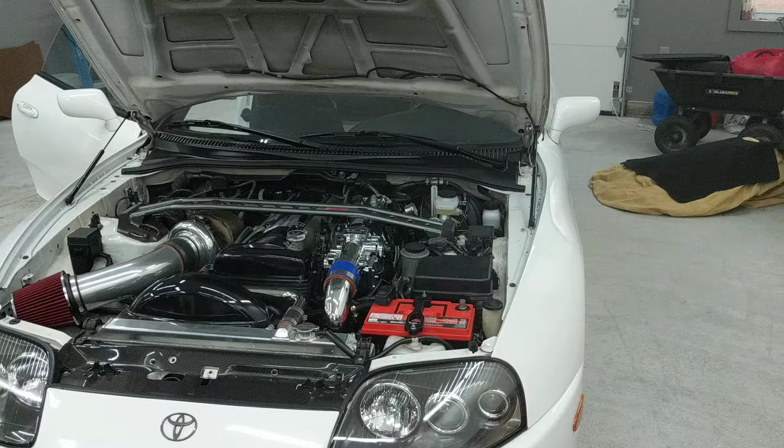Hey, it's Charlie here. I just got done wiring up AEM version 2 for my 95 Toyota Supra twin turbo. Technically it's a single turbo now. I just wanted to go over how I wired everything up, all the sensors, the locations, the wiring, and even talk about the fuel pump pot wire.

So to start, this is everything that I removed from the car. This is the factory ECU. You don't need that when you run AEM, it replaces that box. This is the front O2 sensor, you don't need that either. With AEM, you'll use the wideband sensor to meter everything.

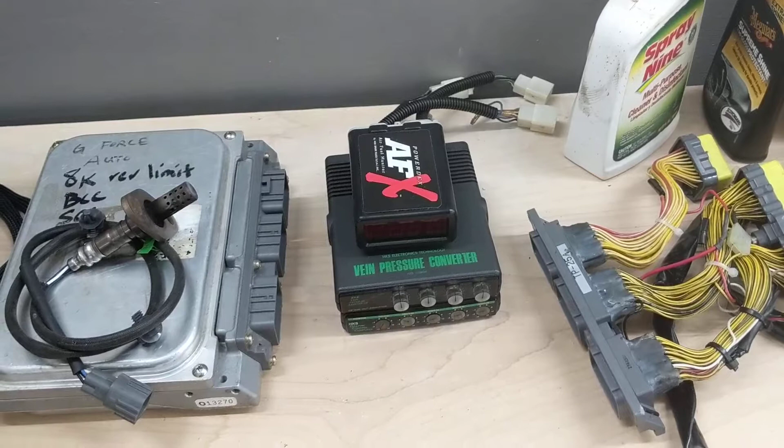My car had some piggyback stuff in it when I bought it. This is all aftermarket stuff. This is an old school HKS VPC and a GCC, and this is an AFX wideband gauge that's also very old school. I didn't need any of that, so I was able to take it out. That was all the wiring for everything.

There was a manual boost controller. I'm going to have AEM control the boost now, so I don't need that. These are just some sensors that went with the old stuff.

And this was an old Boomslang harness, and this would go between the factory ECU and the factory ECU connectors, so that when you wanted to wire in all of this aftermarket stuff, you could wire into this and you wouldn't hack up the OEM harness. But all that is removed. I don't need it, I'll be selling it soon.

And this is what's going in the car. This is AEM version 2, I bought it brand new. These are all of the sensors: there's the IAT sensor, the boost control solenoid, the map sensor, and this is a wideband controller.

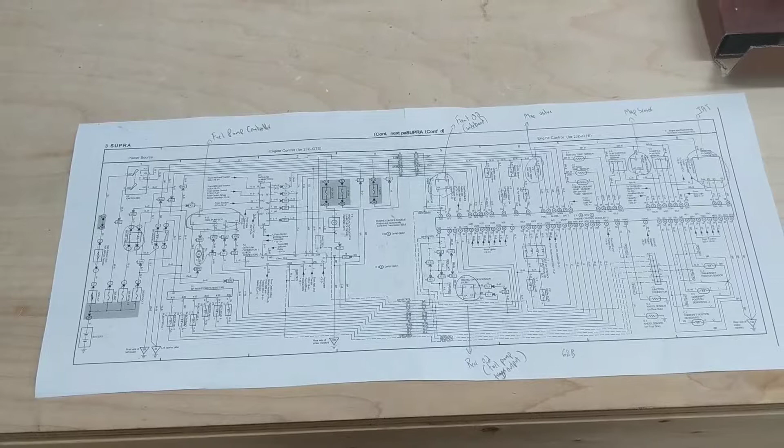Before you start wiring in AEM, I'd recommend printing out the factory wiring diagram. This can be found in the service manual, it's 2 pages, and you have to find where they are in the manual, but once you print them out, you can cut the top off one of the pages and tape it down the center, and then you'll have a view of the entire wiring diagram for the engine.

So I've highlighted a few things we'll be talking about. That's the OEM fuel pump controller. This is the front O2 sensor, this has got to be wired up to be the wideband. This is where the Mac Valve is going to be wired into.

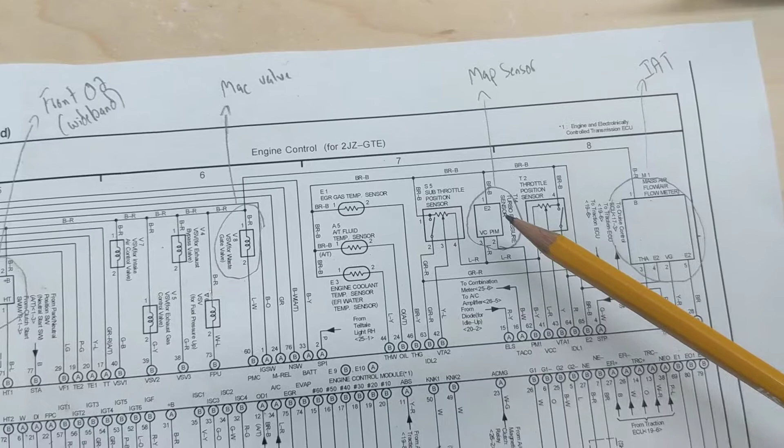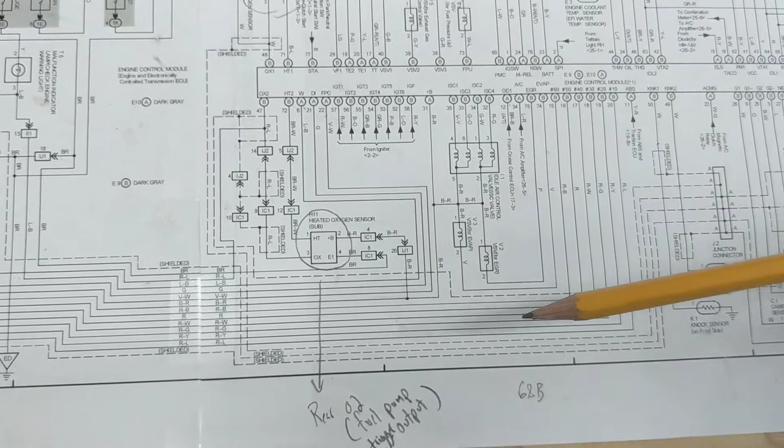This is the factory map sensor location, that's sort of going to be wired in with the AEM map sensor. This is the factory mass airflow sensor, and that gets removed from the car, and we're going to be wiring in the IAT sensor to that wiring. And then down here is the rear O2 sensor, which you don't need with AEM. I'm going to be repurposing one of the low side outputs that went to it to control my fuel pump.

So let's talk about the sensors.

Down here is where I mounted the air intake temp sensor, right on the intercooler pipe that goes to my throttle body. It comes with an aluminum bung to weld in, but my piping is stainless, so I had to order a stainless bung online.

Anyone else that needs the size, it was 3/8 NPT. So I put it here. Some people will argue it should go on the air intake so it measures the temperature going into the car. But I have a front mount that's going to cool the air down, and other people argue it's better to have it after the intercooler, so it's measuring the cool air. That's what I like to do.

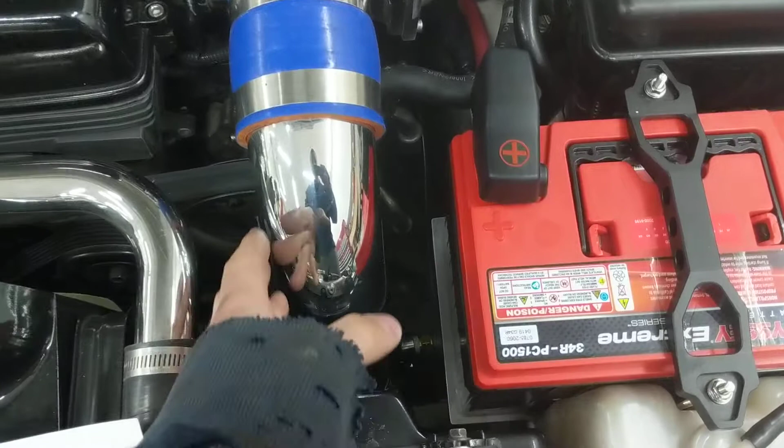I like to mount it down a little bit to give myself some room. I know some people even mount it on the throttle body or higher up, but I don't want it to get heat soaked at all. I wanted to give myself room in case I ever decide to spray meth - you wouldn't want to be spraying meth before the air intake sensor. So this gives me about a foot where I could put a meth nozzle on either side if I had to.

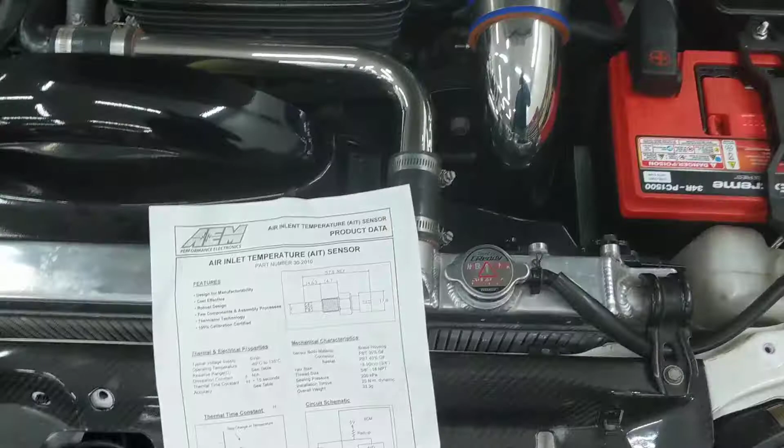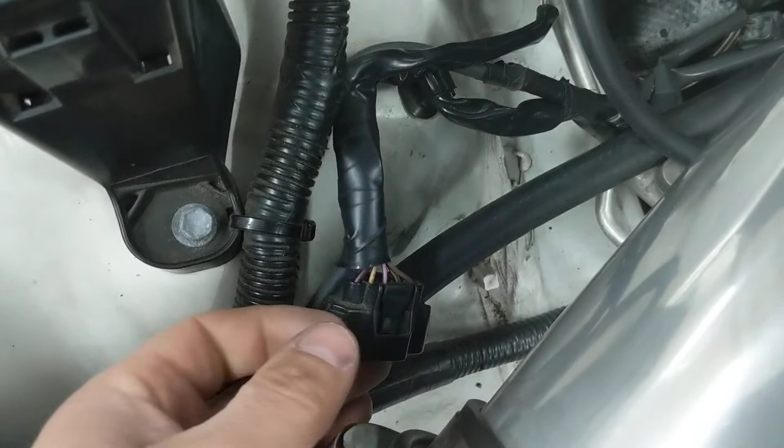So the wiring for that is really simple. There's 2 wires that come off it. One goes to B65, one goes to B45, and those ECU locations already have wires that run from the ECU over to the mass airflow sensor connector. So there's a pink and blue, and a brown and black wire on this connector, and those go back to those ECU locations. So we can tie it in right there.

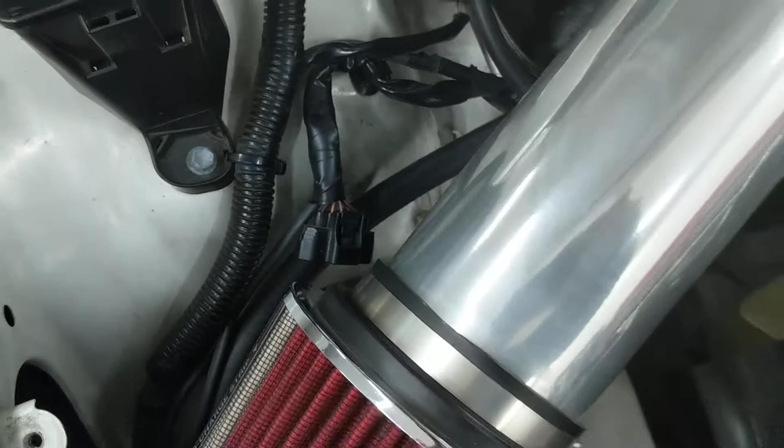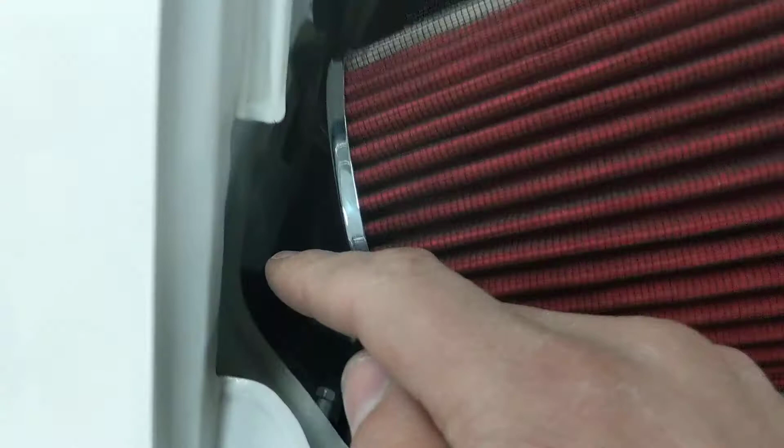The wiring for this sensor just kind of runs around underneath the radiator support. It pops out over here, curls around, and then goes right into that connector. I just cut the sleeving back a few inches, cut the wires, and soldered the 2 wires on there. It doesn't matter which one goes to which wire - it doesn't matter for this sensor.

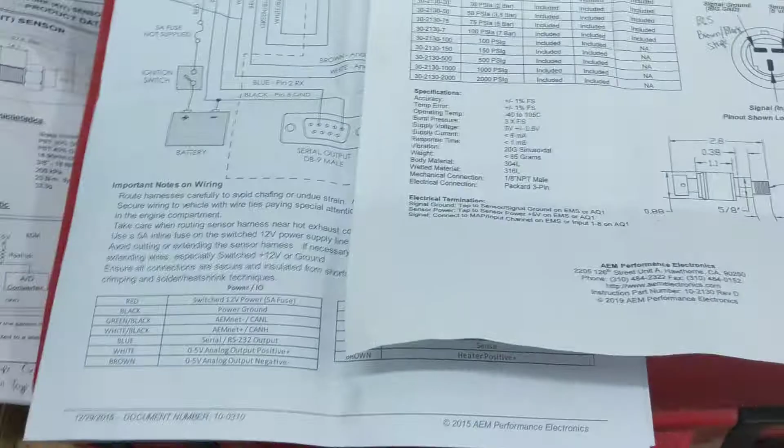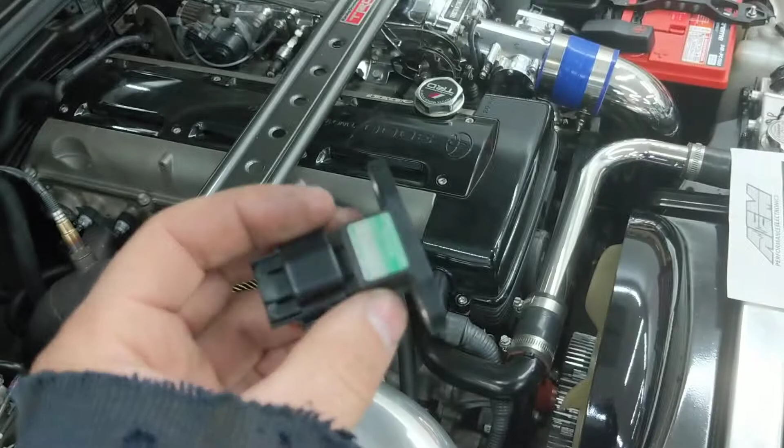So the next sensor is the map sensor. The Toyota Supra actually has an OEM map sensor on the car. This is what it looks like - I've removed it, I've cut the wiring for it. It would bolt right here on those 2 bolt holes that you see. This sensor is only good up to 18 PSI.

So a lot of people doing AEM are going to want to run more than that, so you're going to want to upgrade that sensor. I'm running the AEM 3.5 bar sensor, and I put it in the factory location. You can tap that hole out to 1/8 NPT to fit this fitting.

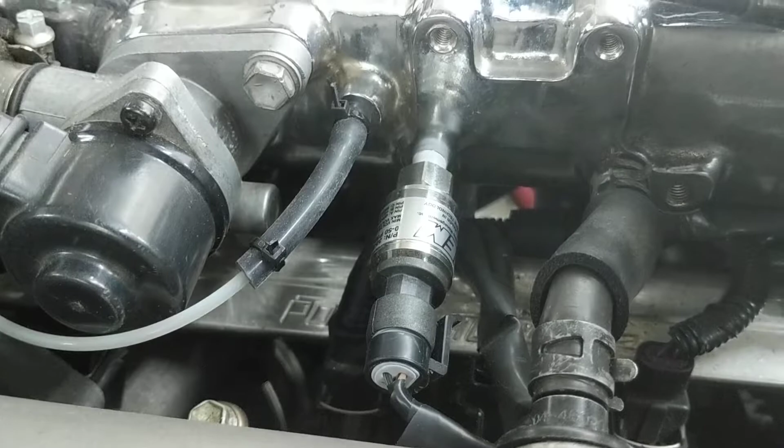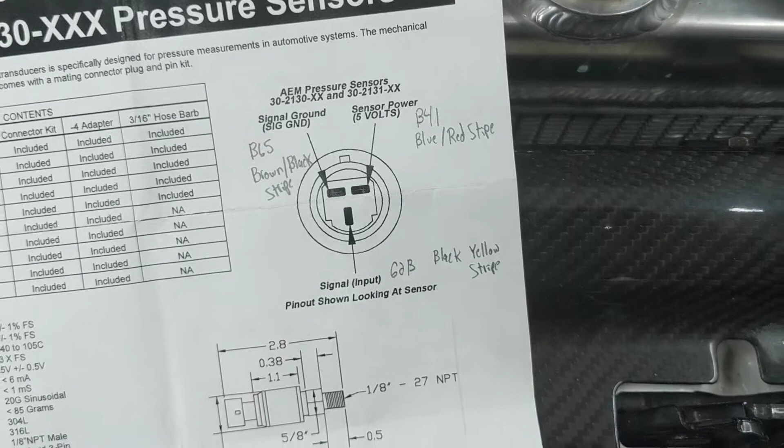The 3 wires that went to the factory map sensor, you can cut and repin them to use with that sensor. If you're curious where those wires go: one wire goes to B65 on the ECU, that's the brown with black stripe - that's the signal ground. The sensor power is B41, that's the blue with red stripe. And the actual signal wire that carries the data is 62B, that's the black with yellow stripe wire. So you can repin that sensor.

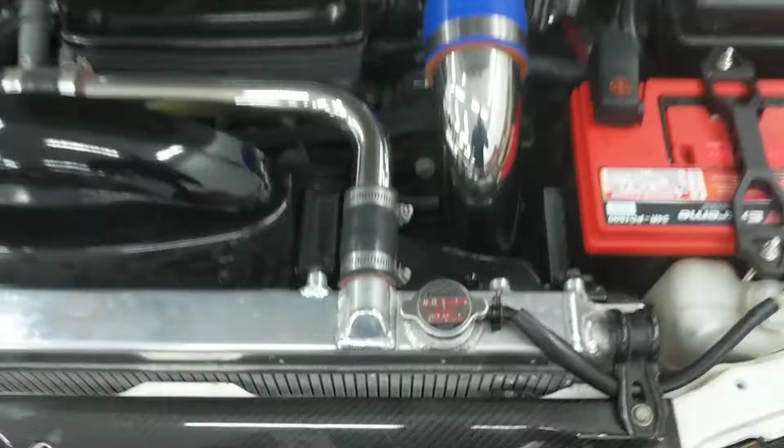Crimp on the AEM - the AEM will come with the actual pins you need to do it correctly. You need one of these Molex tools. These are about $60, but there are some knockoff brands that work pretty well for around $20.

When considering the map sensor, I went with the 3.5 bar versus the 5 bar. You got to think about how much boost you're going to run. So 1 bar is 14.7 PSI. So 3.5 bars kind of sounds like you'd be able to run 14.7, let's call it 15. So 15, 30, 45, half of 15 is 7.5, so 52.5 PSI is what you'd think you'd be able to run.

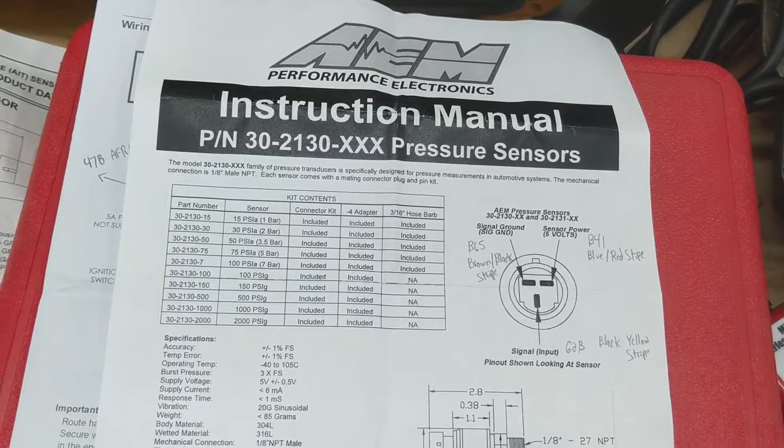But really one of those bars is for vacuum, so it's more like a 2.5 bar sensor. So you got 15, 30, 37.5 - that's about the boost the sensor will be able to read up to correctly. So that's what I went with. I'm going to be running about 30 PSI, which is plenty sufficient for a sensor that can read up to like 37, 38 PSI.

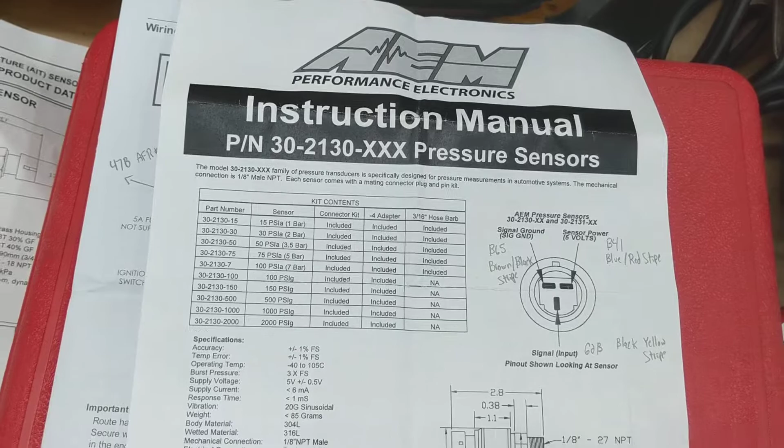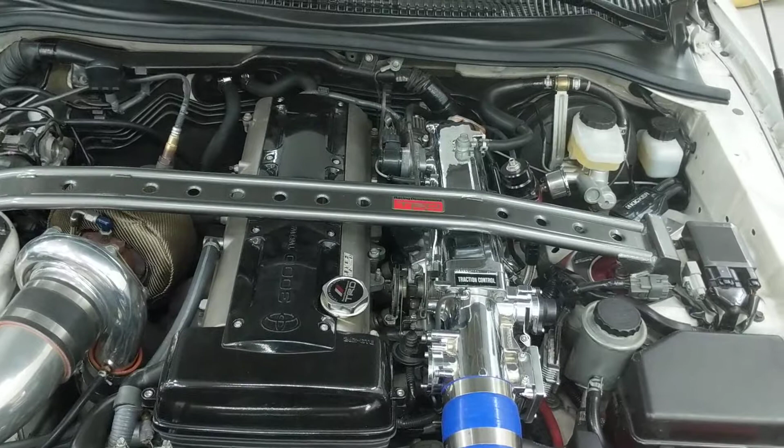But if you're going to be running more than that, you're going to want to use the 5 bar sensor. Why not just buy the 5 bar sensor? I believe they're the same price, but it's all about the scale. If you buy the 5 bar sensor and you're not using above 37 psi, that's kind of a waste of scale at the upper end. You'll get a better reading when you're utilizing a scale for the whole range versus that wasted space at the top. It'll be more accurate.

So that's what I did, and just to show you one more time, I actually tapped it with the manifold on the car. If you remove the throttle body and look straight in, you'll see there's like a 3-inch shelf where the shavings will drop, and the runners are to the right of that shelf. So I shoved a towel in there to block off the runners, and I slowly tapped it by hand, watched the shavings drop right on that ledge, and then vacuumed them up. I didn't have to pull anything because that looks like it would be a pain to pull.

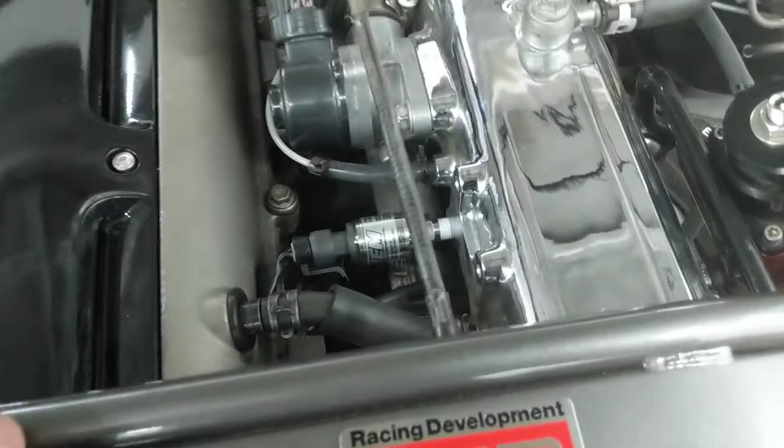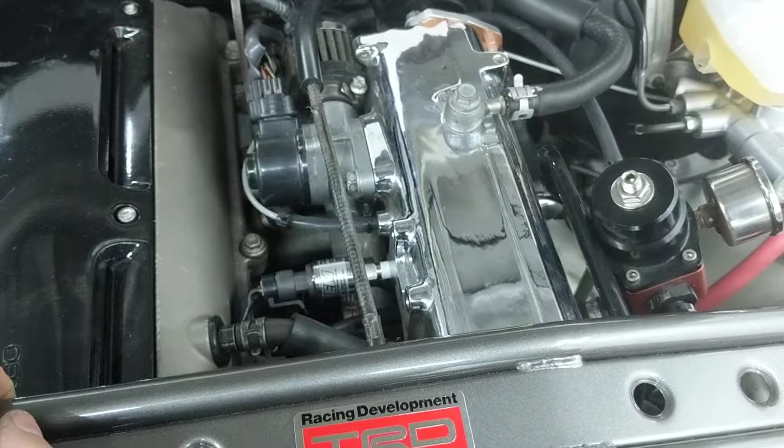The other argument you'll hear people make is don't mount it directly to the manifold, because engine vibration can cause problems. I've never had an issue with that on my 3000 GT, so that's what I did. Plus the factory one is mounted to the manifold as it is. But if you're one of those people, you could mount it remotely and run some vacuum line to it, put a nipple in the manifold, and extend the wiring to reach it. That's always an option, but I think it looks pretty clean right there.

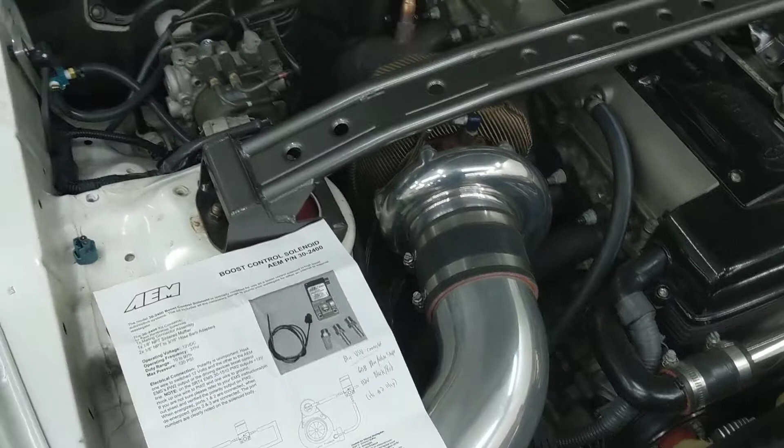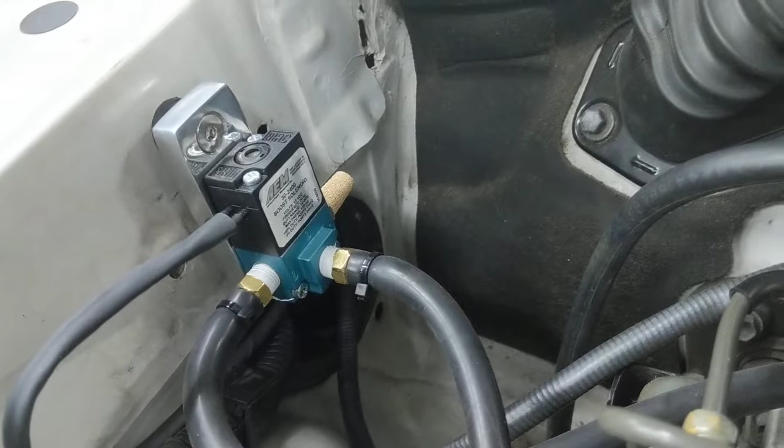The next sensor is the MAC Valve. This is the boost control solenoid. It's sold by a company named MAC. You could buy it directly from them for a lot cheaper. AEM will put their sticker on it and increase the price quite a bit, but that's the actual valve right there.

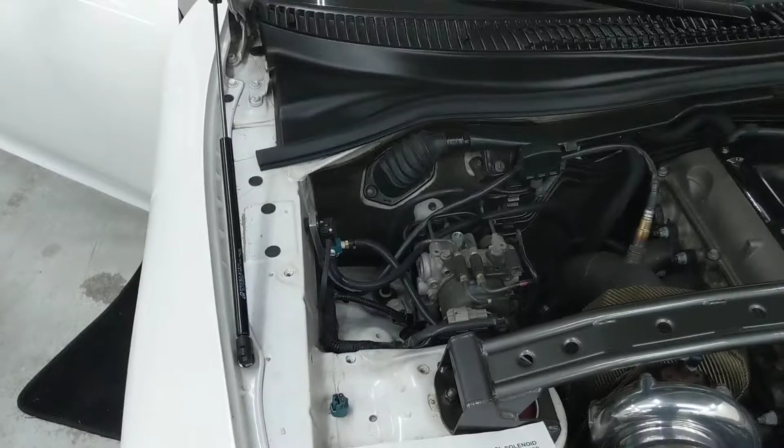I made a little bracket to mount it. You want to use some kind of rubber isolator bushing, because if you mount it directly to metal, it's got to transfer a lot of noise. There's a valve in there that opens and closes really fast, and you'll actually hear it inside the car. So you want to use some kind of rubber isolator bushing for that.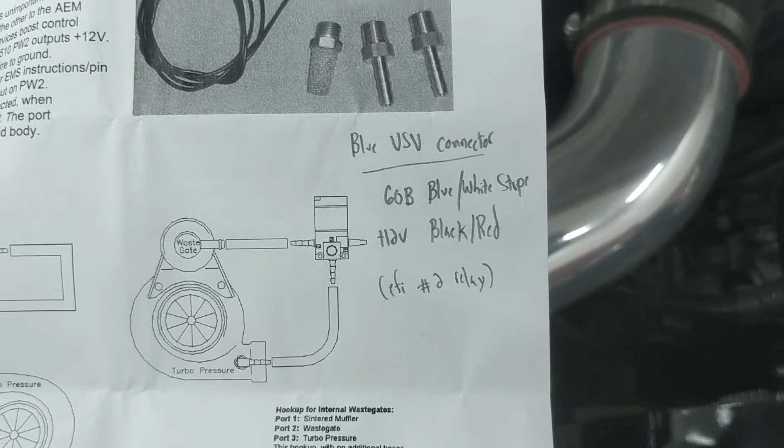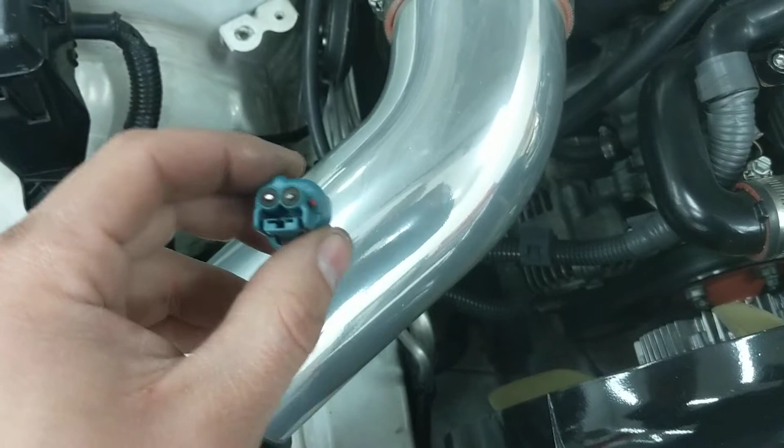There's 2 wires that come off that. One of the wires needs to see switched 12 volts, and the other needs to go to pin 60B. Fortunately, that ECU location and a switched 12 volts already exist in the engine bay. It's one of the VSV connectors, a blue VSV connector. This is the connector—I cut it off so I could wire it in. That's down here off of these pigtails. One of them goes to the alternator, and I think one of them was the O2 sensor.

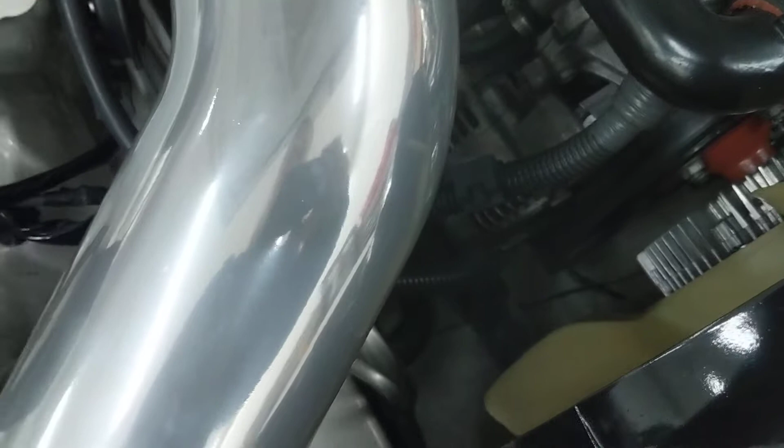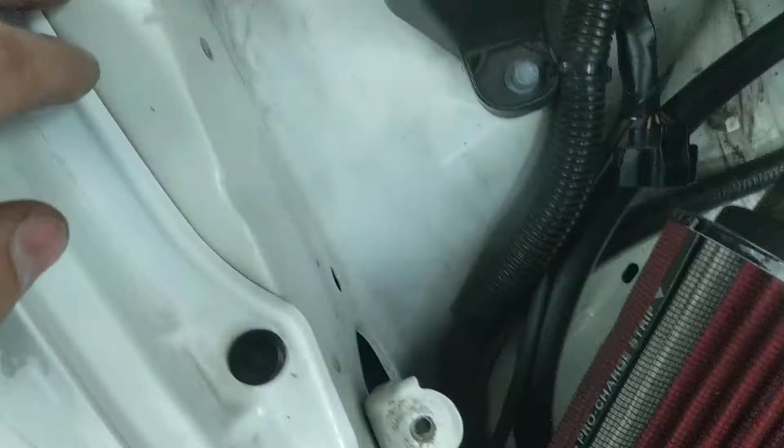You can't really see the connector because I cut it off, but it was right off that little tree of pigtails. For the wiring, I didn't want to run it over near my turbo because it probably gets pretty hot there. So I was able to fish the wiring—it actually goes through this grommet, runs underneath here, pops out here, and then goes right where it needs to. I just used a coat hanger and pushed it through there till I could feel it, then taped it on and pulled it through. That way it's protected from heat, I don't have to worry about it, and it makes it pretty clean. I don't end up with a line running across here.

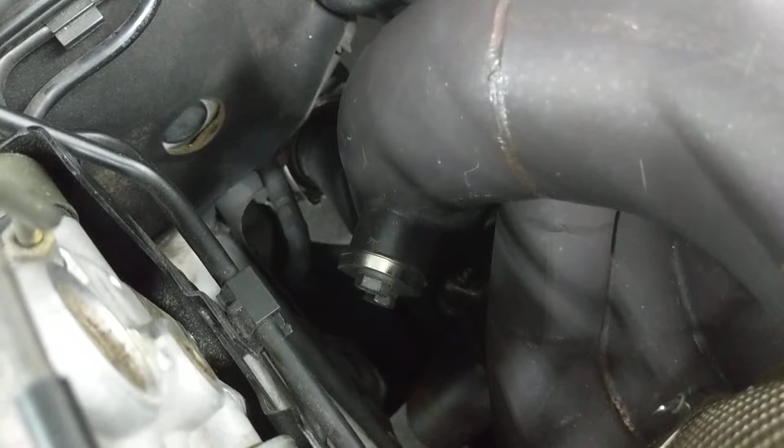So I had mentioned earlier that the factory O2 sensor can be removed. This is where the front one is. I've already removed it and I've got this block off plate installed there. I purchased that off eBay, I think it was $35 shipped. It's made of stainless, probably a little bit overpriced for what it is, but it's a lot easier than trying to mock one up yourself.

This is the wideband sensor for the controller that I'm using, and that goes right through the same opening and goes into the cabin. There's a connector I have tucked in here to undo it.

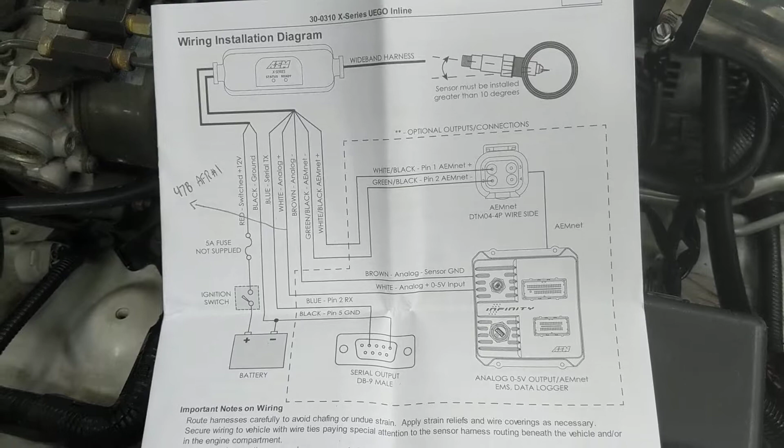That wiring is pretty simple. There's only 3 wires that you need to worry about: a red switched power, a black ground, and then different outputs depending on what kind of signal you want. AEM wants a 0 to 5 volt signal, so that's the white wire that comes off of the sensor, and that will go to pin 47B, the air-fuel ratio number 1 location on the AEM ECU. On the stock ECU, that would be the front O2 sensor.

Technically, you could wire it into where the front O2 sensor plug is in the engine bay, but you'd also have to find a switched power out here and a ground, and the harness that comes off of the sensor is about 10 feet long, and that's a lot of wiring to hide in the engine bay. Let me just show you. Maybe it's even longer than 10 feet.

Probably. This is the other end of that sensor. When you tap into the wire, you want to tap into it after this box. You don't want to tap or even touch any of the wiring before there. There's a resistor and stuff in here that's been calibrated for their sensor, so you don't want to interfere with it by soldering anything above there.

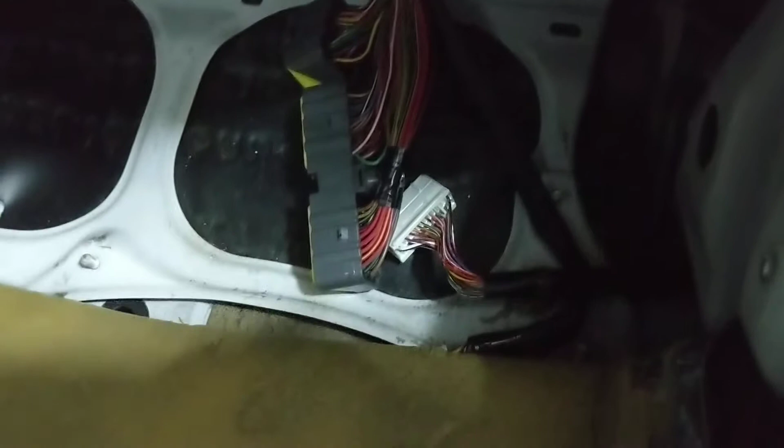So you'll want to tap into the white wire here. Those are the ECU connectors. I'm going to find the wire, snip it back about 5 inches, and then tap the white wire into it. If for some reason I ever needed to undo it, I just have to reattach the one OEM wire there.

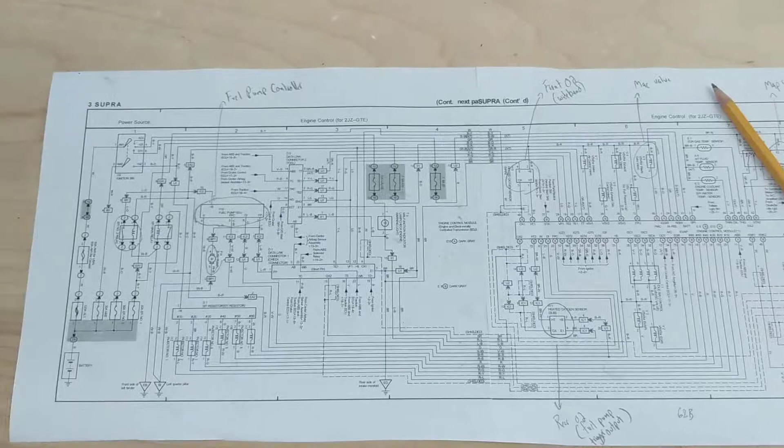So that covers the wiring for all of the main sensors for AEM.

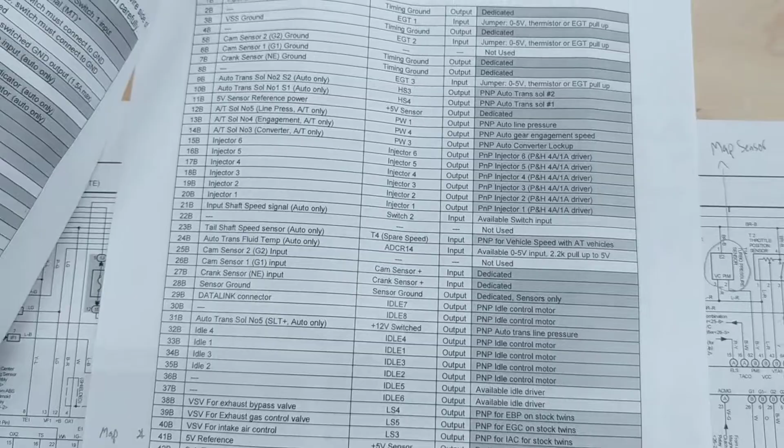If you look at the wiring diagram, it'll show you the actual ECU connector here and tell you all of the connector information. You've heard me say B62, A15, etc. Those are the pin locations I was referencing in the AEM manual. It'll tell you what each pin location does, and I put some asterisks next to the ones I'm using.

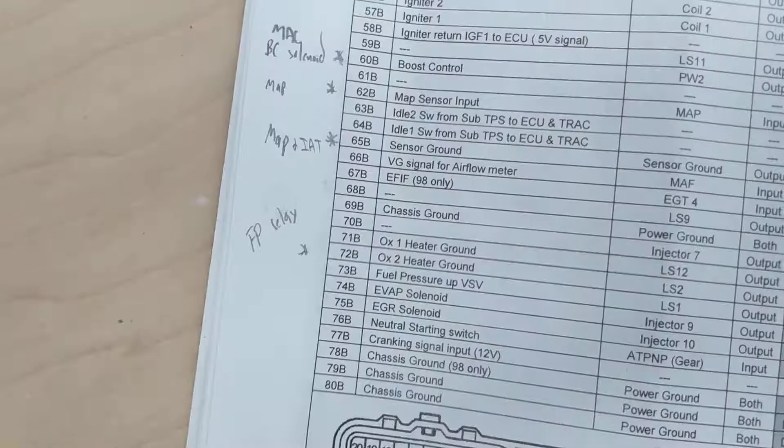It's a good idea to double check too. I like to use a multimeter. You can turn it to this audible setting, press this, and anytime the actual leads touch, it'll beep. So if you've got a wire under the hood and you think it goes to pin B45 where the ECU is, you can gator clip this under the hood to that connector and touch the other one inside the car, and if you hear the beep, you'll know that wire goes where you think it does.

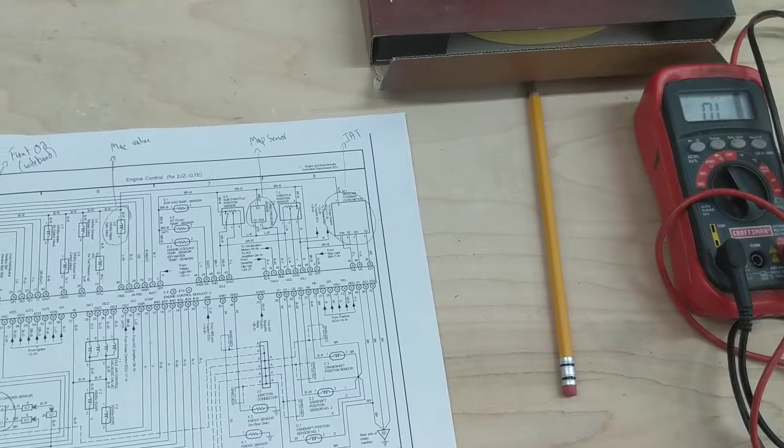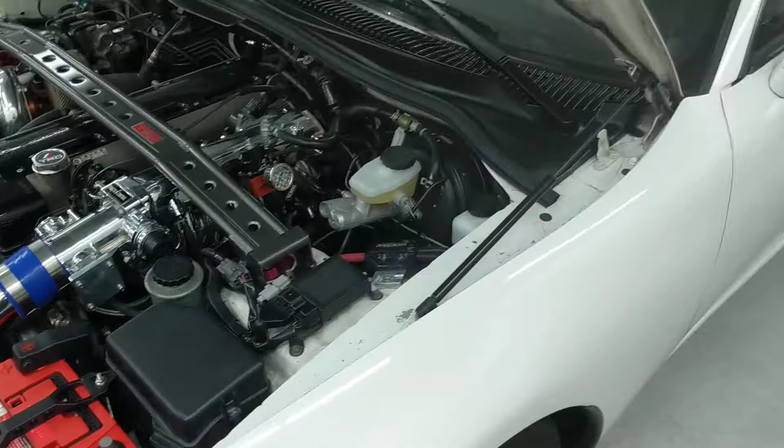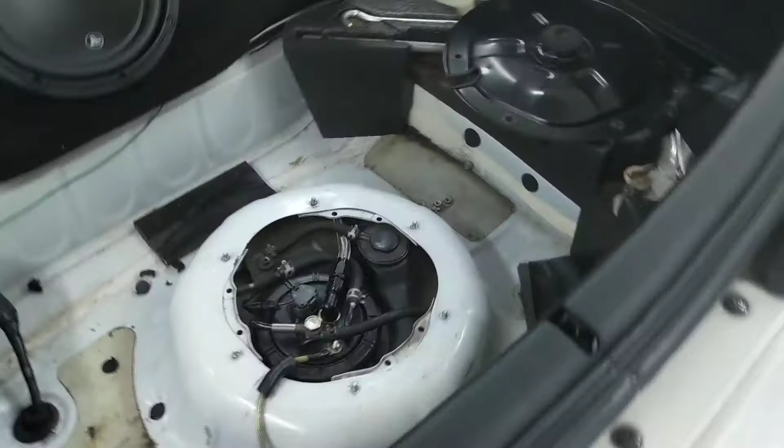Now I want to talk about the actual fuel pump in my car, or fuel pumps rather. This has 2 Supra OEM fuel pumps installed. It came that way when I bought it. One of the fuel pumps uses the main feed location, and the second uses this AN fitting that someone tapped into the top of it, and it was all powered by some 8-gauge wiring. I think I have it right here.

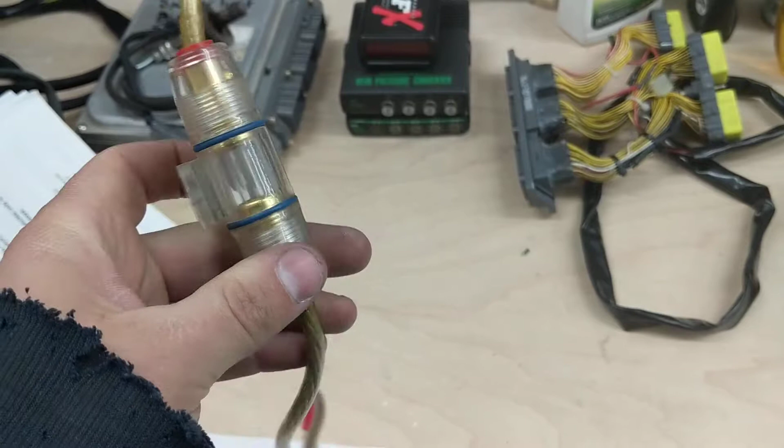This is the power wire that was going to both of those fuel pumps. I replaced it, upgraded it. This is just cheap aluminum wire. I'm not a fan of it. I like to use the oxygen-free stuff. And it was kind of borderline on the small side as it was.

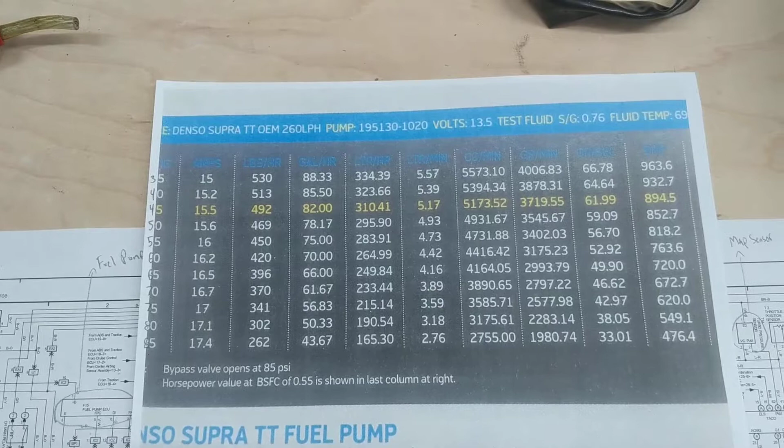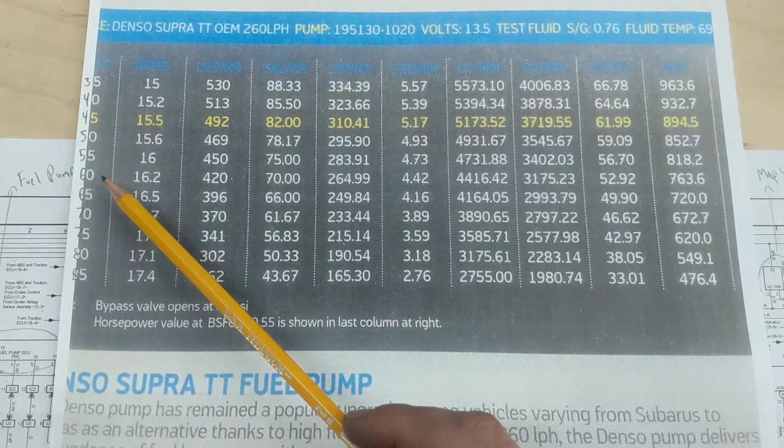So to calculate what size wire you need, you get kind of a flow chart for the fuel pump you're dealing with. This right here is for the Denso Supra fuel pump, which I found online. Over here is the PSI for the fuel pump. So base fuel pressure is usually 43.7, let's call it 45. At base fuel pressure, it's using 15.5 amps.

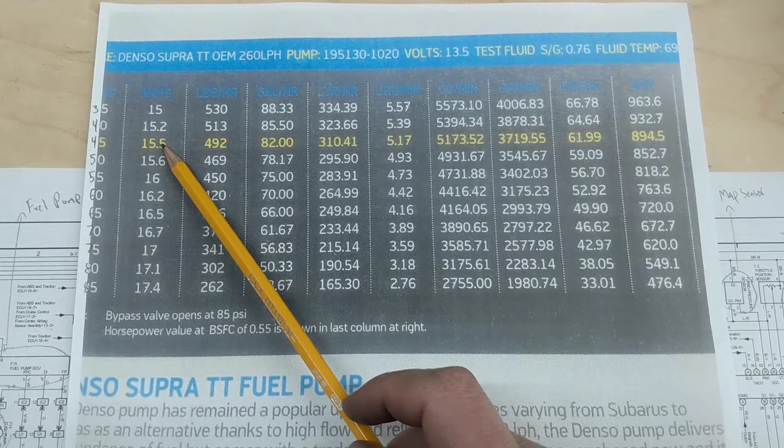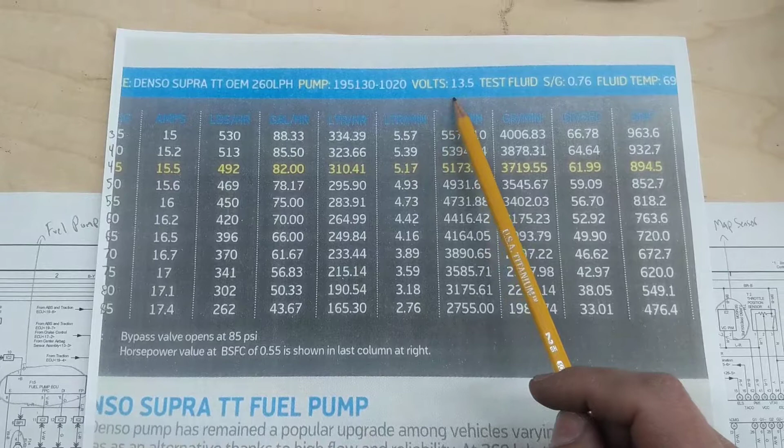This car is going to see around 30 psi. So when the fuel pressure regulator sees me running at full boost, that's going to bump up 30 more psi. So 45 plus 30 is 75. That fuel pump is going to pull 17 amps, potentially even a little bit more if I go above 30 psi, or if my alternator outputs more. This test was done at 13.5 volts. Who knows, my alternator may output like 13.6 or 13.7.

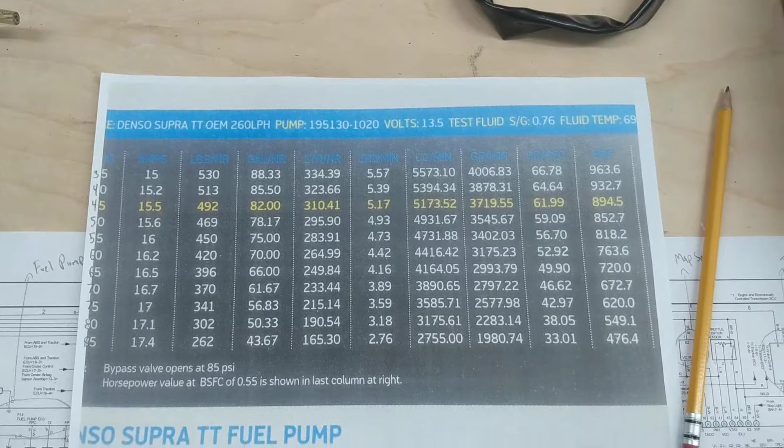So I like to add a little bit just to be safe, call it 18 or 19 amps, and that's for one fuel pump. So I have two of them, so I need to double that. If it's 19 amps per fuel pump and you double that, it's 38 amps that it's going to be pulling.

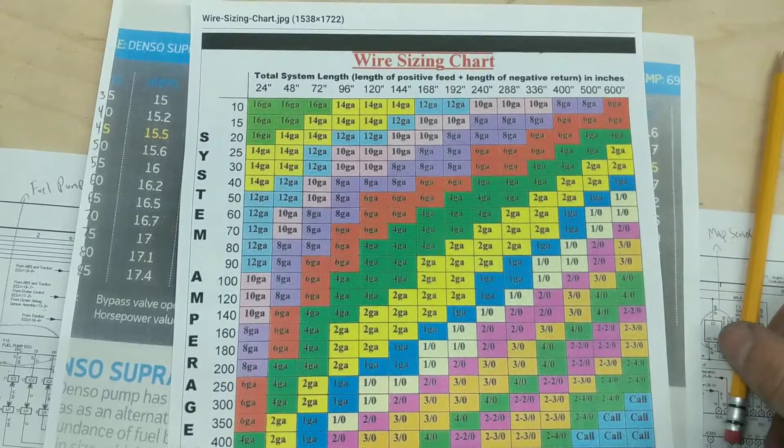So there's different wire sizing charts online. I've looked at quite a few of them, and there's actually some variation, which is kind of crazy. You'd think they'd have one chart for everything.

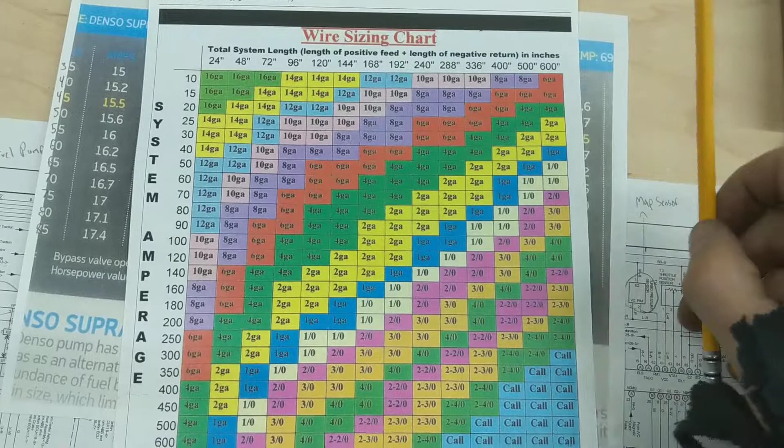But if we go about 12 feet in wiring, and I just said it's going to be 38 amps, which is about 40 amps right here, is what you would need, and it's kind of on the edge of being between 8 and 6 gauge.

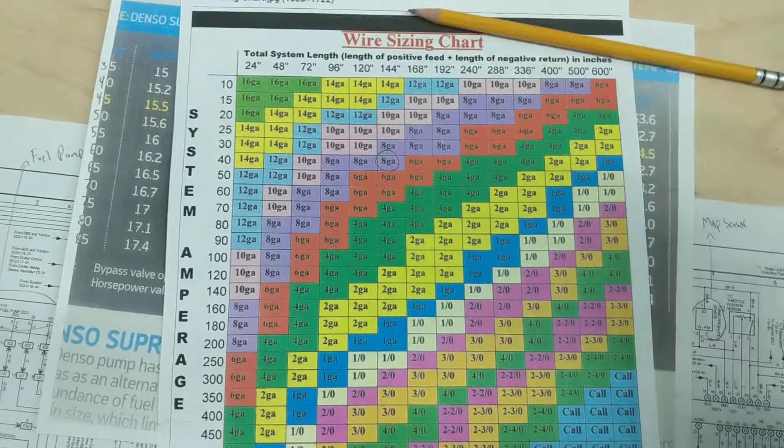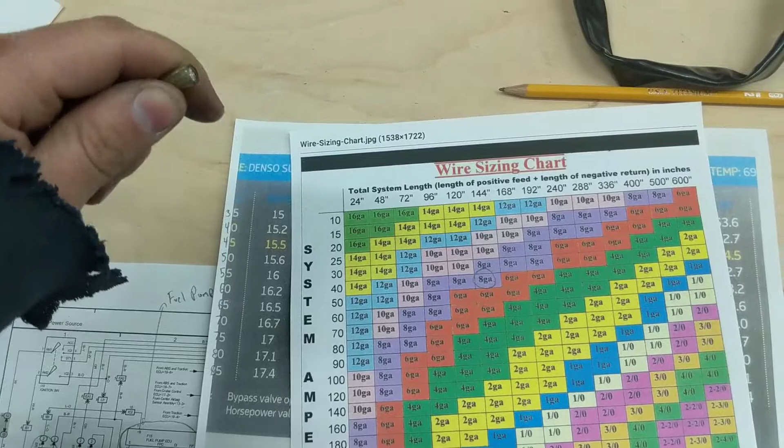So this aluminum wire was on the edge, and it's kind of cheap wire to begin with. A lot of the cheap wire like this is undersized. It's not a real true gauge, and it doesn't work as well.

So I'm doing mine with some quality wire. This is oxygen-free copper. You can tell that it's copper because, one, it looks like copper. Two, it's not the fake copper, that CCA stuff, which is aluminum wire that's coated with copper, because when you cut it, you don't see any silver in the strands here.

The other way you can tell is just by weight. It's pretty heavy. And kind of the final way to tell is how much you pay for it. This stuff costs a lot more than the aluminum wire.

So my fuel pump is said it could be 8 or 6 gauge. I like to always do a little bit of overkill, so I'm running 4 gauge to the back. And this is how I did it. So here's my battery.

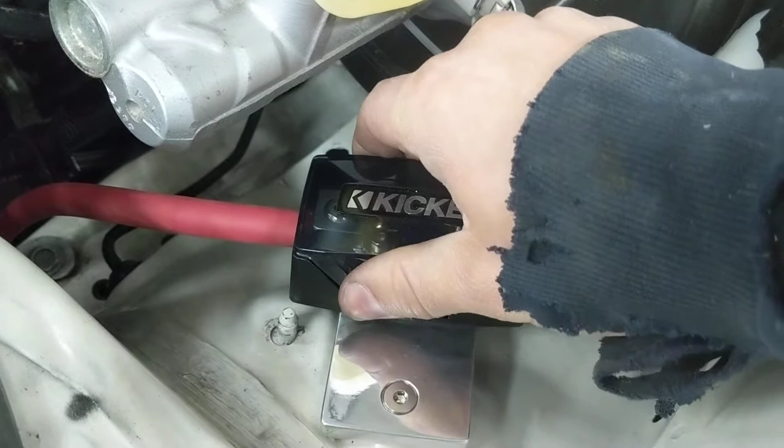I crimped on some 0 or 1 gauge wire that runs right over here to this Kicker distribution/fuse block. So this has 2 fuses in it. There's 2 4-gauge outputs. One of them is going to my amp underneath the passenger seat, and the other is going back to the fuel pump.

I do plan to get some wire loom to cover this red wire. It's pretty heavy duty as it is, but I want some extra protection. The wire loom I have wasn't thick enough, so I think some 3/4 loom would work.

But that feeds into the car, runs down underneath my carpet, goes out under this panel, and then comes into the trunk. It's right here. I put some loom on it. It goes to my relay.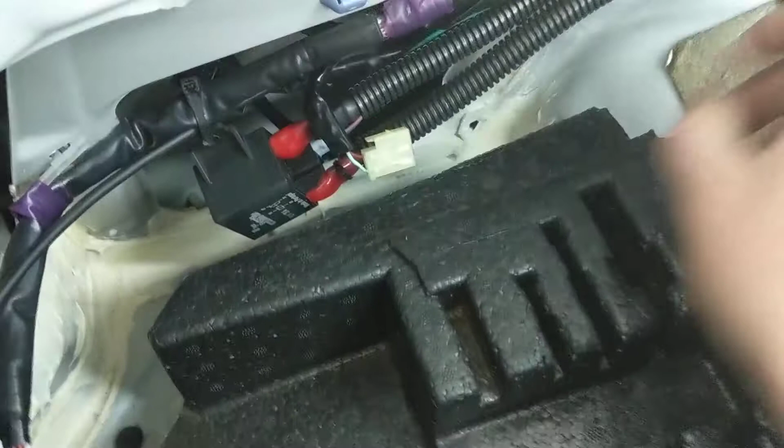And this is a nice relay. It's a Tyco relay, rated for 75 amps, which is plenty. You recall 38 amps is what both fuel pumps would pull running on full boost, and this can handle it.

A lot of the cheap little square amps that you get at an auto parts store are only rated for 15 amps. So if you're using 2 of those, one for each fuel pump, or even worse, one for both, that's scary. You don't want to burn your car down or anything. So I'd recommend getting a quality amp or a quality relay.

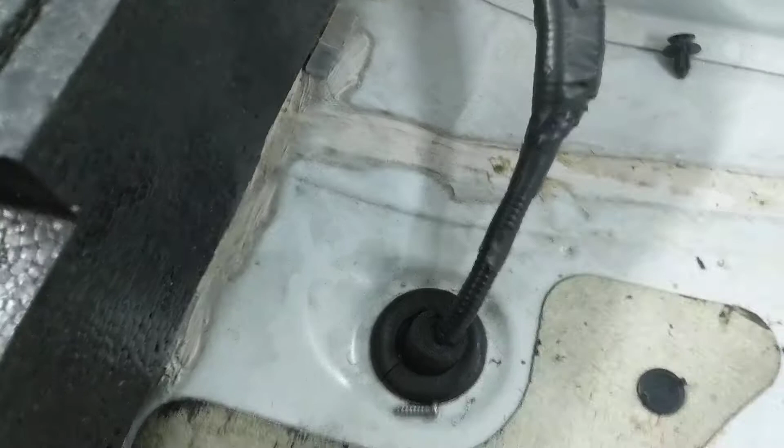And then the 4 gauge goes into that, it outputs. I wire it here into some 8 gauge wire, and that goes down here, and that's where I tie into the factory wiring. So on the connector that provides everything to the fuel pump assembly, there's several wires. The 2 thick ones are power and ground for the single fuel pump.

So what a lot of people do is they'll repurpose that ground wire and make it power to the second fuel pump, and then they'll add a lug to the top of the assembly, and that will be the ground for everything, because you want to use the thickest wires that you can for both fuel pumps. So repurposing that ground gives you exactly what you need.

This is more of that kind of cheap wire that I don't like. I am going to replace that with some 4 gauge oxygen-free copper wire like I have. I just didn't want to use what I have because it's red, and I'm going to get some black wire and use that just so I don't have red wire acting as a ground.

To make all of the connectors, you can make some really nice connections online. I got this tool. I'm very happy with it. It's really fun to use, but it's a nice tool for crimping everything together.

So I showed you how I'm getting power to the fuel pump relay, but I wanted to talk about actually triggering it.

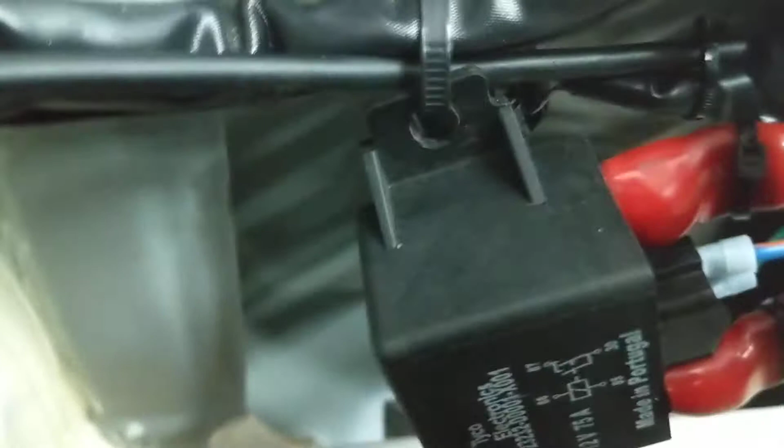So the factory Supra system has a fuel pump controller in the car, and I don't have that. It didn't come with the car, someone removed it. But it normally bolts behind here, the relay connection. You can actually see the connector for it if you look close in the back there, wiggling around.

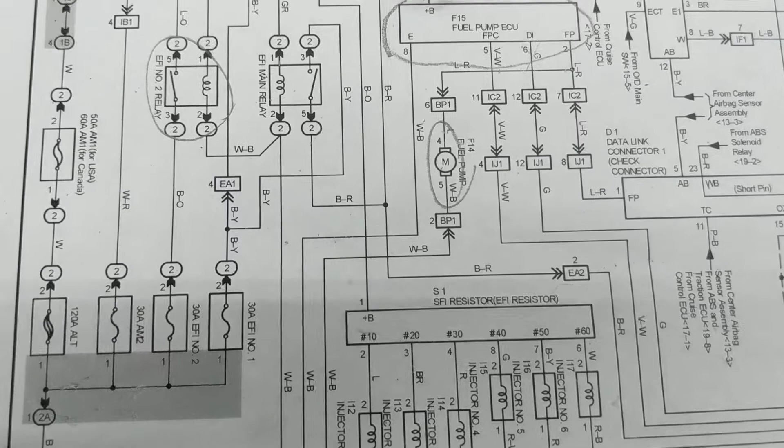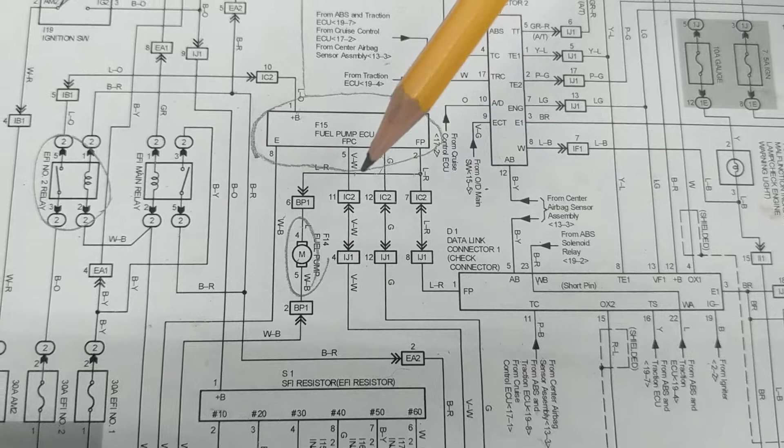That was the connector that would plug into the fuel pump controller. The way it worked is when you turn the ignition on, power would come through this EFI relay, it would go to the fuel pump controller. Then depending what the car is doing, this fuel pump control wire would tell it whether to send 12 volts or less to the fuel pump. So if you're idling, it wasn't running at a full 12 volts, which made it easier on the fuel pump, I guess. Subarus do this a lot. Toyotas, I guess, do it as well.

And I don't have this anymore. So when people bypass this, they'll usually connect this blue with orange stripe wire to this blue with red stripe wire, and it makes a very good bypass there, right? That's how a lot of people will bypass it, which is fine.

So now that I have that relay in there, I'm going to use this blue with orange wire to give me power to the relay trigger, and then I'm going to use the AEM to ground the other side. That's exactly how they recommend doing it in the actual manual. So this is the manual.

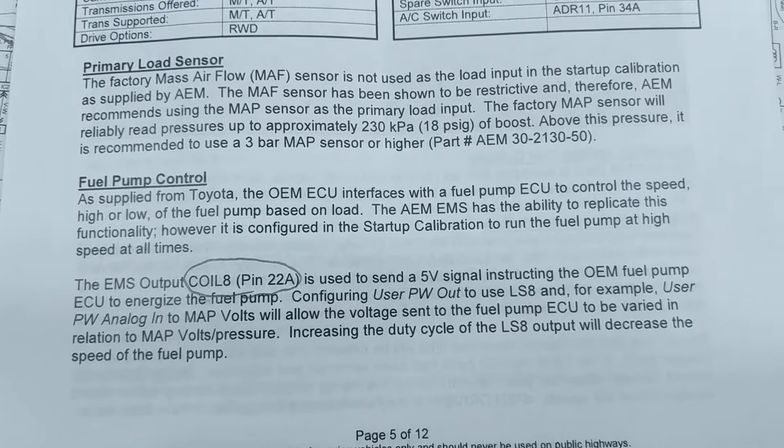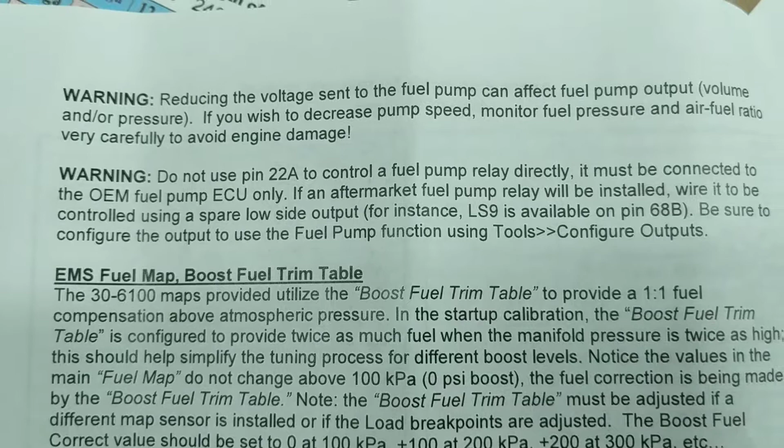Right here on fuel pump control, they'll tell you that if you're using the OEM controller, which I'm not, you can use pin 22A to vary the voltage to signal if you want the car to run the fuel pump at 9 volts or 12 volts. And they'll warn you: do not use pin 22A to control a fuel pump relay directly. It must be connected to the OEM fuel pump ECU only.

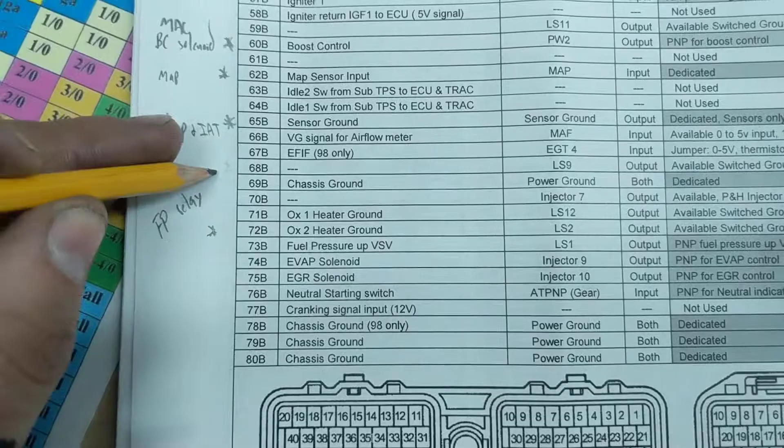If an aftermarket fuel pump relay will be installed, which I'm using, they recommend using a low side output, and they did LS9, for example, which is pin 68B. So they tell you, you can use 68B, which is right here—it had no use on the stock ECU, and it's switched ground.

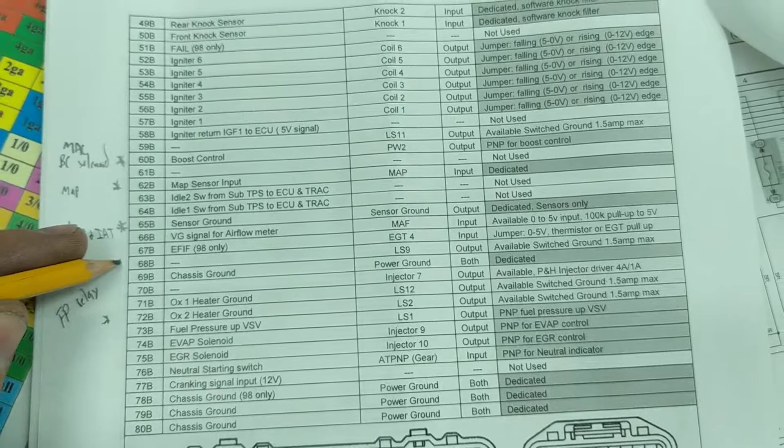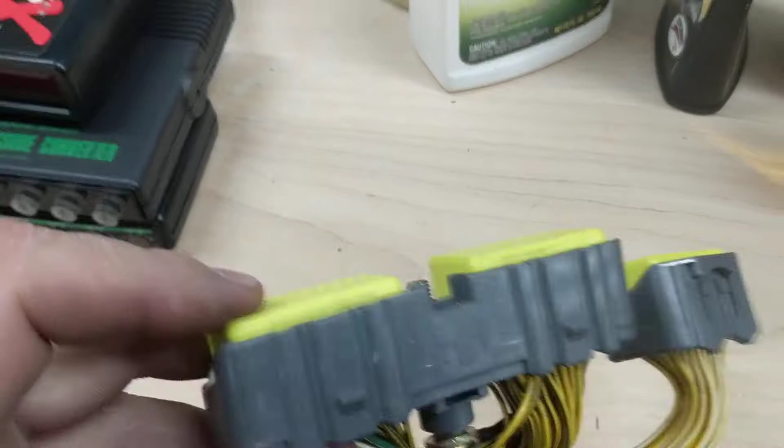And that was my original intention, was to use this. When you look at the back of the connector—I'm not going to show you in the car because it's hard to see, but we can look at this Boomslang harness—when you actually find 68B, there's no wire coming out of it, and it looks like it's almost sealed shut. So I'm not sure how you'd add another pin into here, so I would not recommend using 68B.

I'd recommend using pin 72B, which is the rear O2 sensor heater ground. It's available for a switched output. So that's what I'm going to be using.

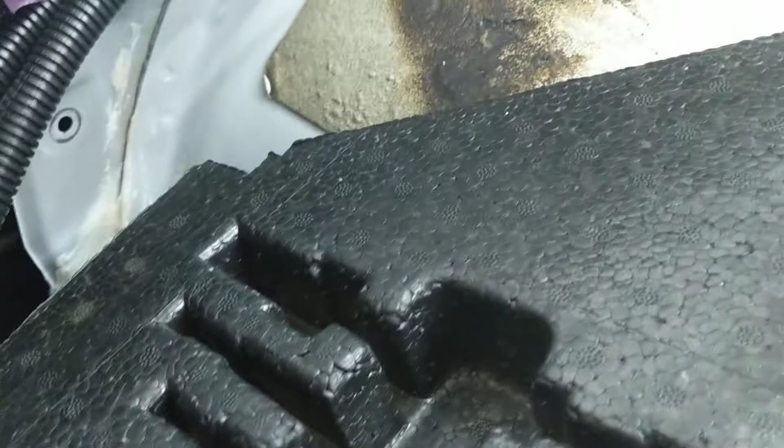So I've ran a wire from the other side of this relay. There's my power in, there's my power out that goes to the fuel pump. One of them is the blue with orange wire that would bring power to the controller. And this green wire that you can see running here goes all the way up to the ECU.

I've got it sticking out somewhere down there, and I'm going to do just like I mentioned doing for the wideband controller. I'm going to find that rear O2 sensor wire, cut it back a little bit, and tie in that green wire that I ran up to the front. Here's the green wire right here.

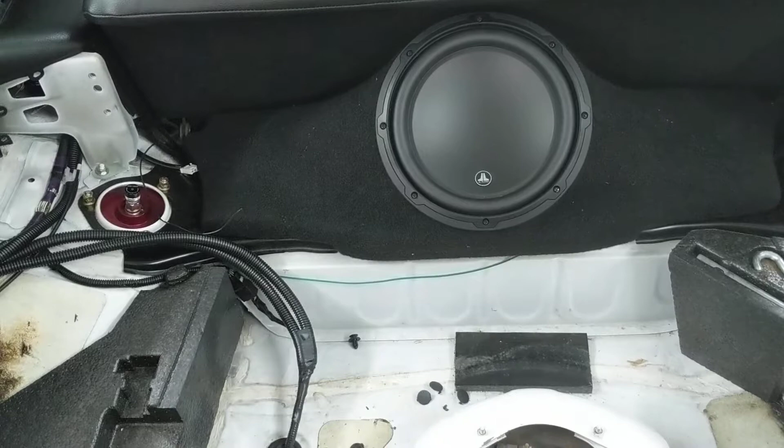That way, when I turn the ignition on, I can have AEM prime the fuel pumps. They'll run for 2 seconds and then turn off, versus how I had it before, where they'd run whenever the key is on. So if you're sitting in your car with the key on and it wasn't started, both of your fuel pumps would be running.

So that about covers it. I think I went over everything. Let me know if you guys have any questions or what you think of the video. Thanks.